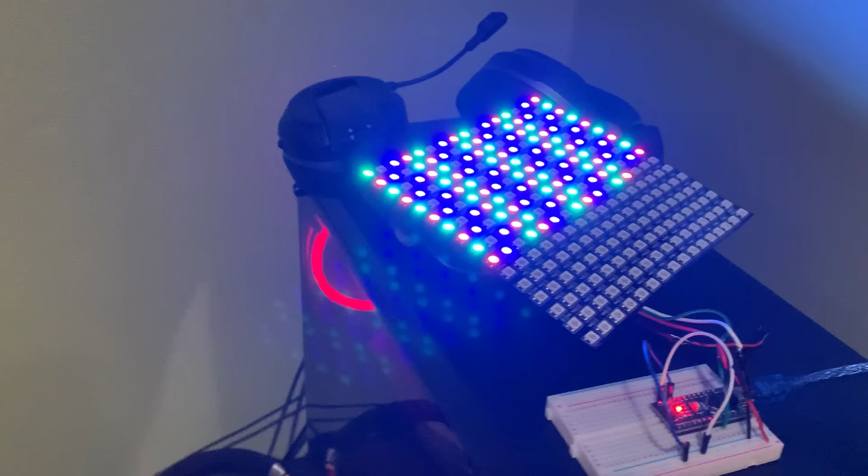So first let's figure out some of Boomy's key features. Maybe the most defining feature is Boomy's animated face. The eyes are always changing shape, and the whole face even changes to a danger icon. My first thought that comes to mind is to use a NeoPixel board. Basically, a NeoPixel board is a matrix of LEDs, and you can program each light to light up however you want it to. So I'm thinking I can program each face right onto the NeoPixel board.

Boomy can also drive itself, and it also has lights all over its body. So we're going to need a bunch of LEDs and some decent motors. Next, we have the collision detection system. Boomy bounces off of walls and is able to turn as it ricochets off of obstacles.

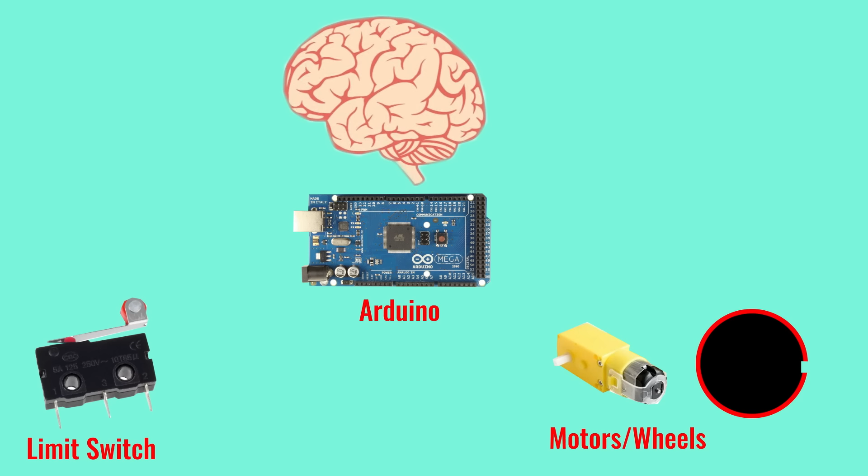This is an Arduino. You can think of it as the brain of the robot, and this is a limit switch. My printer uses them for homing. When the limit switch is clicked, it tells the printer's brain that the hot end is at the end of its travel path. If we strategically place these on Boomy to click when Boomy hits a wall, we can send the message to the brain and then tell Boomy's wheels to back up and turn.

Notice how Boomy has a scanning laser. I found these red lasers on Amazon that I think are used for scanning barcodes. If I could attach this laser to a servo arm, I could easily recreate this feature.

You guys keep asking me, does it explode? Does it explode? You guys are gonna make me explode, Jesus.

Now that we have a general idea of how to do all this, I started to sketch out some of our ideas. The NeoPixel is 16 by 16 lights, right? So maybe we can create faces by grouping lights together. Here I'm trying to plan out exactly where to put the limit switches so the wheels can push on them when Boomy hits a wall. Now let's order some electronics that we know we're going to need.

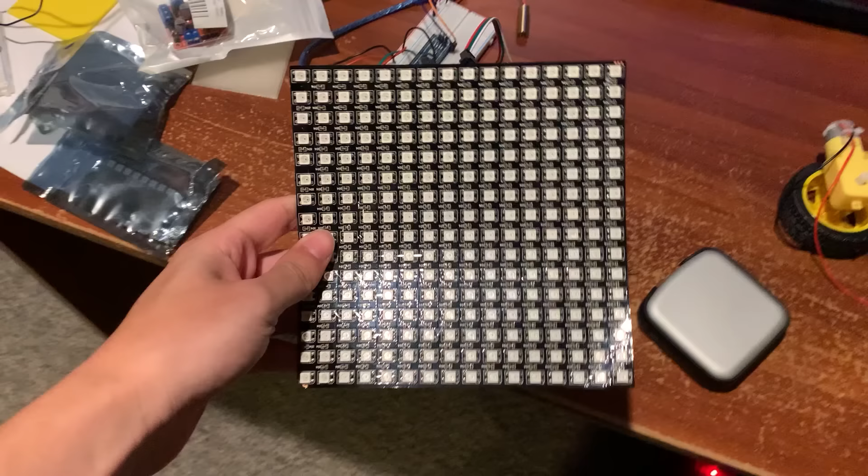Alright, so this thing was a good starting point for us, but we really need a smaller NeoPixel board. So I ordered a smaller one. I think this one's going to work a lot better. It's an 8 by 8 instead of the 16 by 16. I also printed out a bunch of different diffusers, some in clear PLA and some in varying thicknesses of yellow PLA. I decided on a 4mm thick piece of yellow PLA that's printed completely solid. It seems to get the job done.

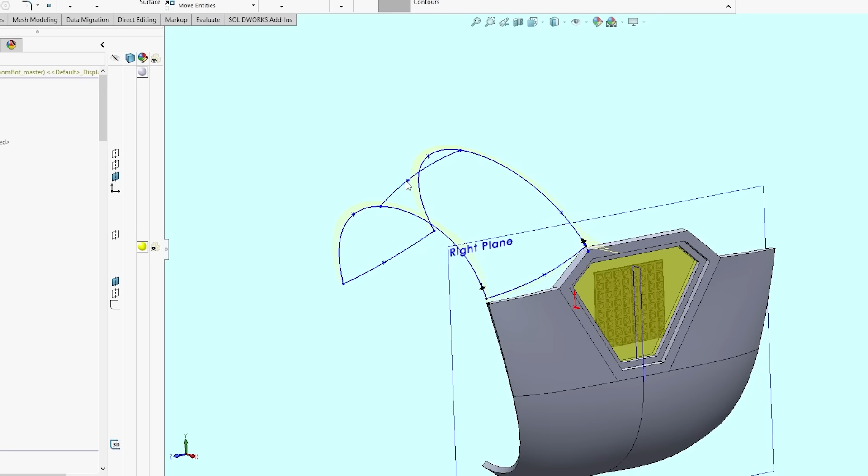Now it's time to 3D model Boomy. Let's get it. The entire model was created while referencing some images of Boomy, but everything was built around the scale of the NeoPixel board at the center. Boomy has some really complex curves, so I surfaced the outer shell using splines. And here we are. Boomy is alive and well, guys.

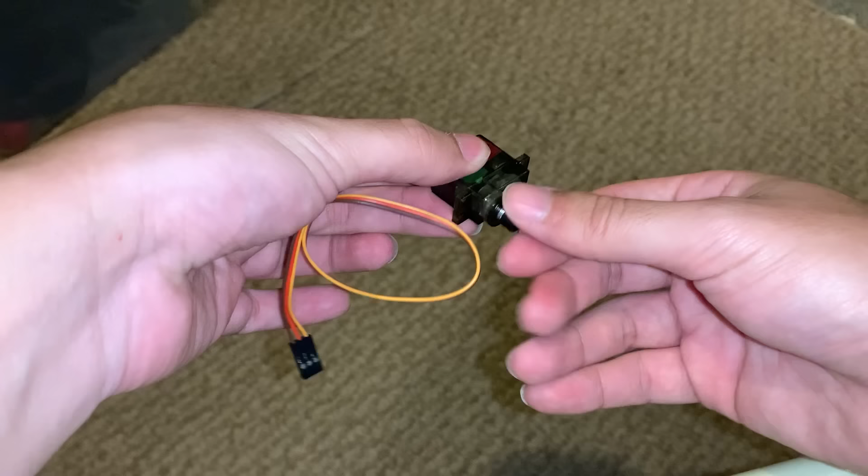Yeah. Alright, so Boomy is going to have two modes. First, when Boomy is turned on, it'll switch between a couple of faces, and the top is going to pop up. I'm going to recreate this feature with the 4-bar linkage mechanism I designed. Basically, a servo is going to move the roof up and down to give Boomy some emotion. I don't even have to test it because I know it's going to work. And if it doesn't work...

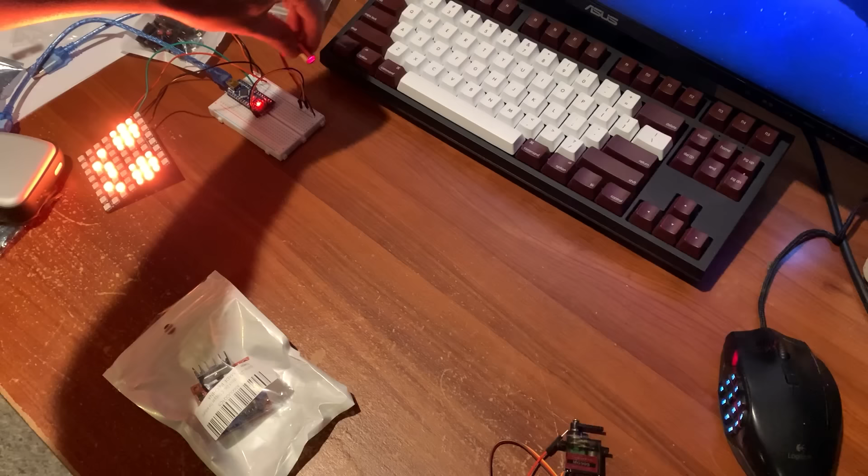Alright, so the next part of the design we're talking about? The second mode will be button activated, and Boomy will drive forward with hobby motors looking for enemies. As Boomy is driving, the scanning laser is going to move up and down on a servo arm. Boomy also has a collision detection system. The wheels rotate, and when Boomy hits a wall, it will trigger a limit switch that tells Boomy to back up and pivot. The infrared sensor will allow Boomy to see humans, and it will attack anyone it sees, speeding up in the direction of the enemy.

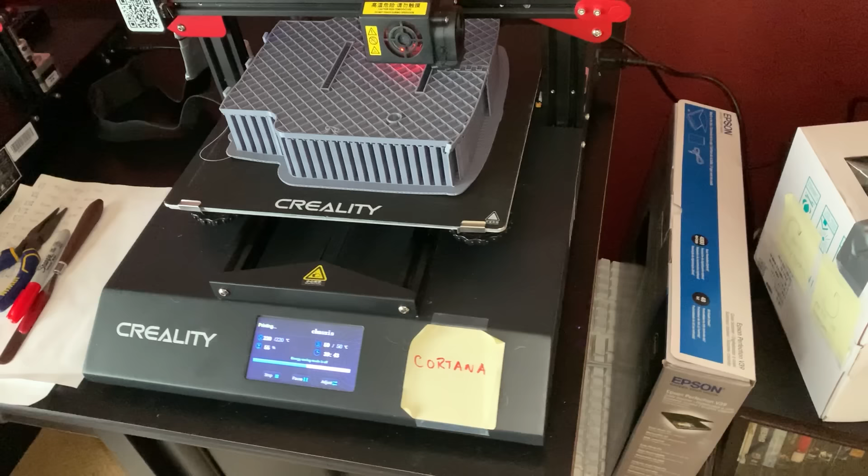In the meantime, we'll start printing out Boomy. I printed these parts out on my two CR10S Pro V2s. Alright, so this is the 4-bar mechanism I designed to move the top hinge, and it works on my first try, dude. Look at this. So the servo's gonna drive it back and forward. Your boy's a freaking genius, yeah. I also got the scanning laser to work. Check this out.

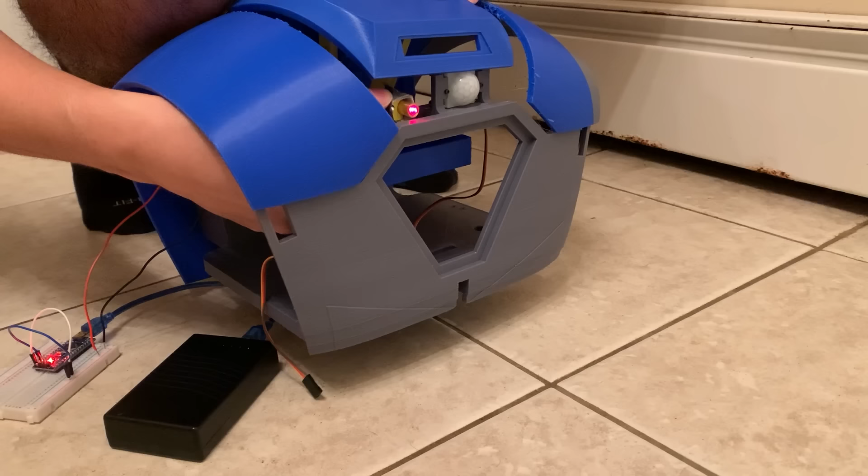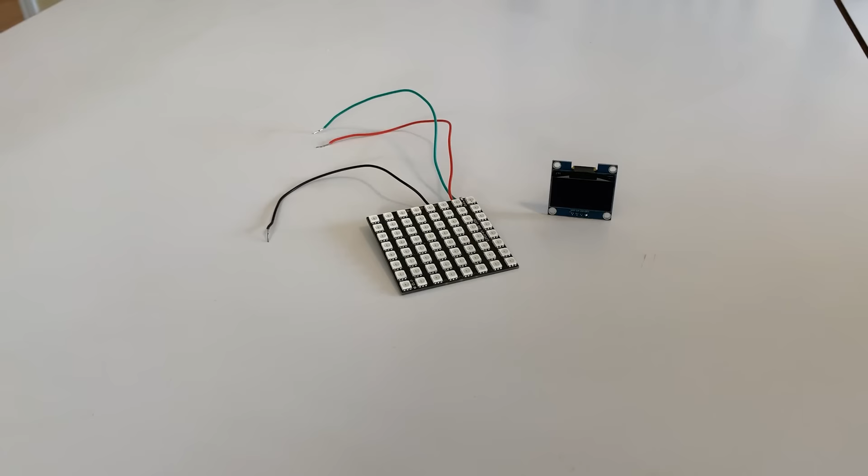Someone on TikTok suggested I use an OLED display instead of a NeoPixel board because you can display animated GIFs. So we picked one up. Check it out, it's so awesome. But it's small as hell compared to the NeoPixel. Look at that, what the heck? Bro, this is one of the biggest ones they have too.

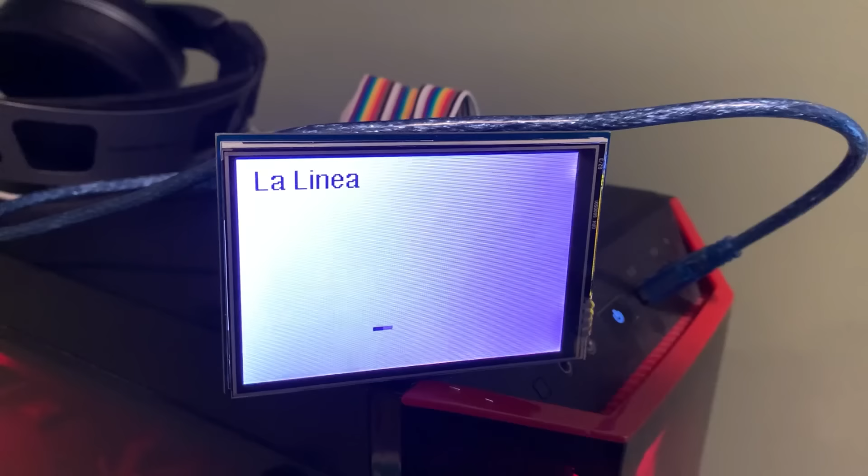Someone else from TikTok suggested using a mini LCD display to display images with color. These things are dope, man. They're nice and big, 3.5-inch size, and apparently are full color displays that you can show animations on. Dude, that looks so bad. Why does it look terrible? Bro, that is just not good. I think the Arduino doesn't have enough memory to process all the pixels on the LCD. Okay, so the animated GIF idea isn't gonna work.

I was looking at the documentation for this thing and I found that you can animate shapes. This could work. Boomy's face is pretty simple. Boomy also has a little bit of a twitch effect going on, and I found this scroll page feature that could be useful. I'm not good at figuring this stuff out, but I am good at taking examples that already work and tweaking them to get kind of what I need.

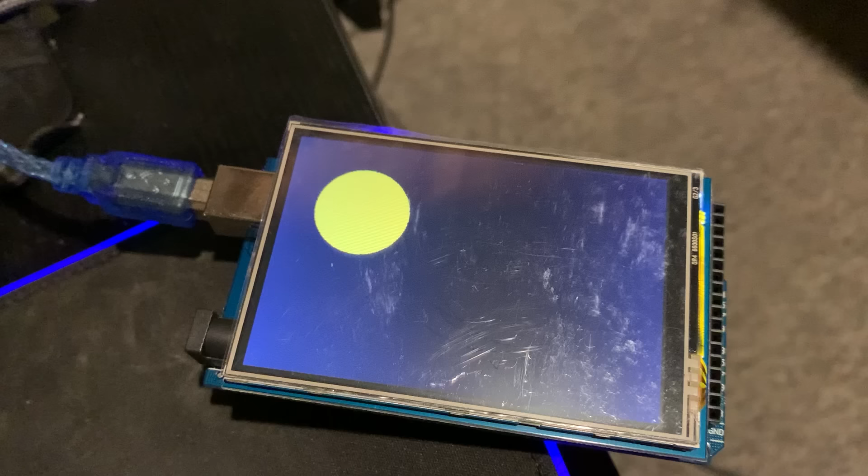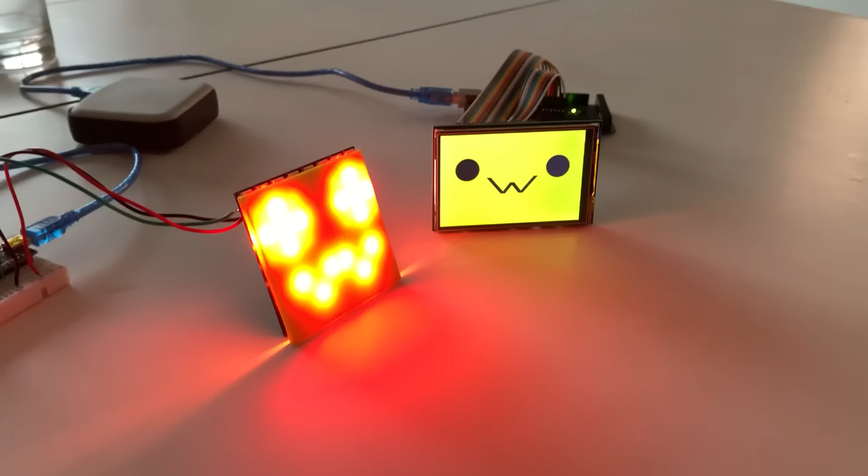First, I started by creating basic shapes and getting the size and position correct. Then I inverted the colors and made the background yellow. Then I made the eyes blink by switching them from circles to horizontal lines quickly. Then I figured out the twitching effect by using the scroll feature back and forth really quickly and just looping it forever. Let's go, baby. I think this looks infinitely better than the NeoPixel, and the fact that I once considered using a NeoPixel is hilarious.

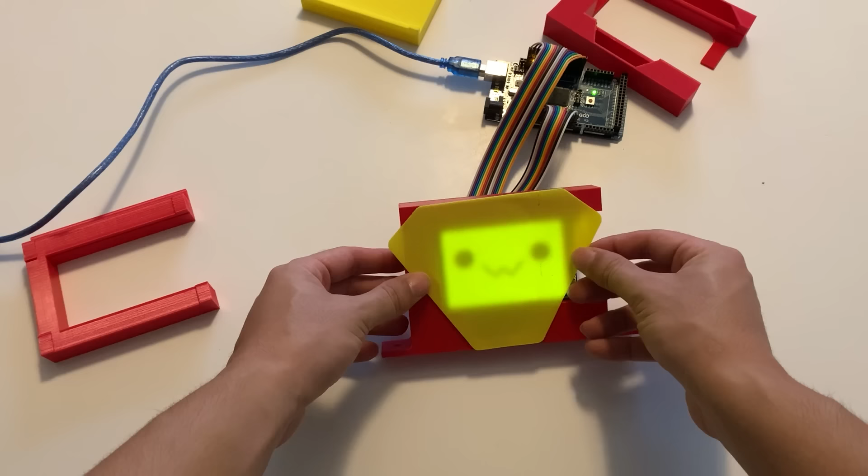The only issue with the LCD is that there aren't any holes that I could use for mounting. So I created this little adapter that I can slide into and that I can fasten down to the housing. The only issue is now there are awkward gaps between the LCD because it doesn't fill the whole front window. So I thought about filling those gaps with LEDs, but this was just getting too complicated.

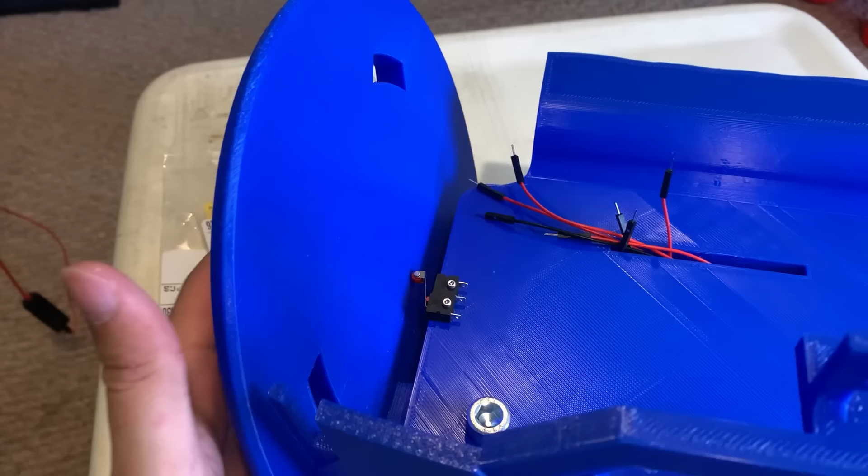Okay, I really want to take Boomy for a test drive, so let's get him wheeled up. I installed all the motors and the wheels and also the limit switches. Alright, Boomy. Let's see what you got. Alright. Not that way? No. It's like twice the size of my head, dude. It's crazy, bro. This thing is also heavy as hell, and I don't even have the top on yet, bro.

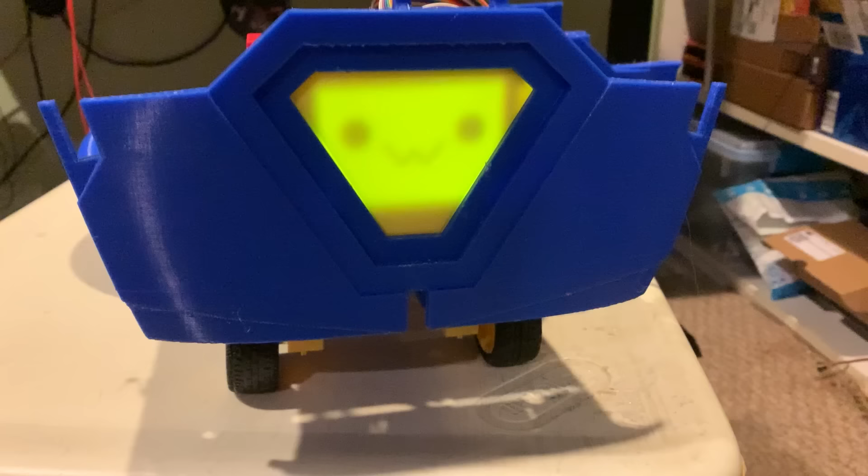Okay, so Boomy's got gaps around the LCD. He's slow. He's heavy. He's too big. And I think he could be more screen accurate. I think I did a decent job in the beginning, but he could look more like the in-game model. So I redesigned Boomy, and I think it looks so much better. He's about 20% smaller, and I added some new features.

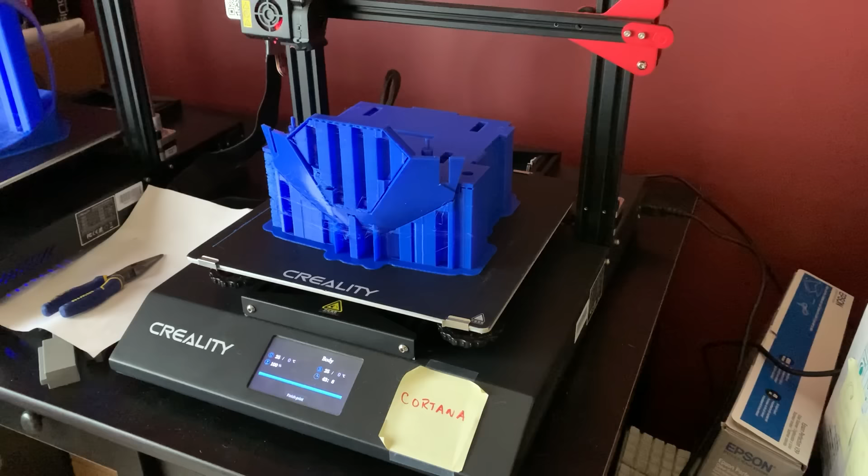I noticed the top swings completely open when Boomy goes into attack mode. I found this cool concealed hinge online, and I created one for Boomy to swing the top open with the servo. Also, I made the side wheels have a double ring design. The inner ring is going to rotate and spin the LEDs, while the outside wheel rotates about a different axis to hit the limit switch for collision detection. Also, this model was built around the LCD, so now the front window is seamless. Now it's time to print the new Boomy out.

Introducing new Boomy. Boomy looks amazing. I'm so glad I did a redesign. Boomy is definitely smaller and more like the in-game Boombot. Now there's no gaps surrounding the face window. Check out the concealed hinge. It works okay.

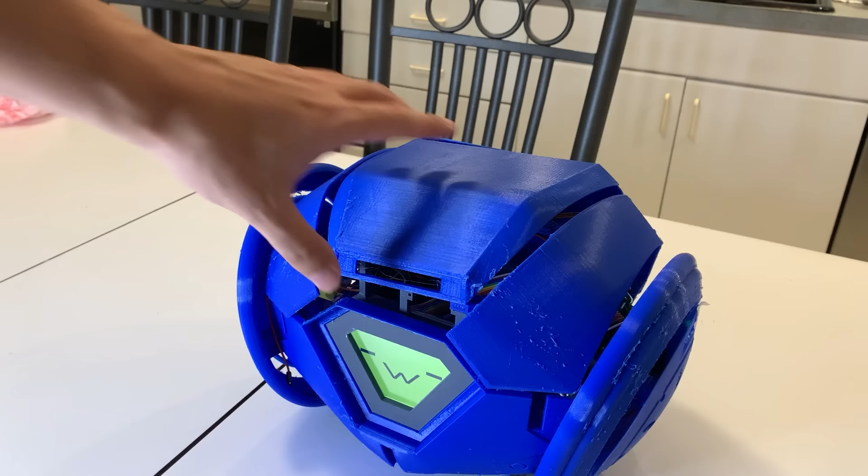It gets a little stuck, so I have to make some adjustments, but it's good for my first try. The dual ring design works great. It's exactly like I planned. Let's do a little test drive.

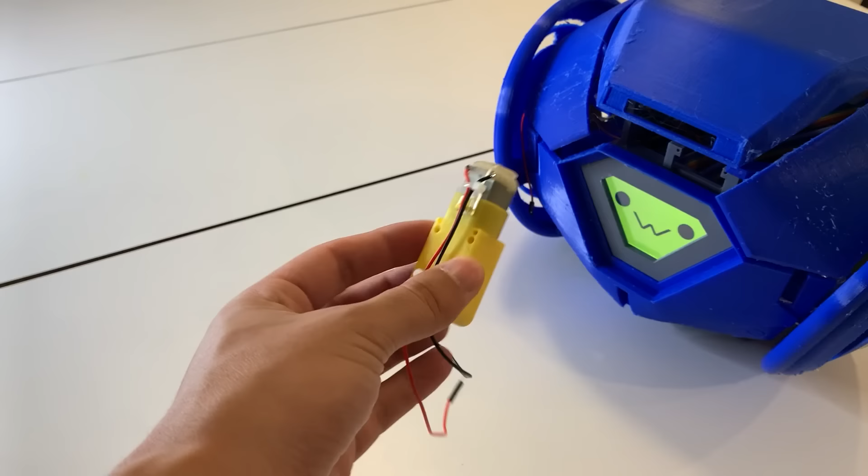Okay, so this is pretty good, but I still want Boomy to be faster. So I ordered a stronger motor with 4 times the torque. Boom Boom's gonna zoom zoom. Since I'm changing up the wheels, I might as well make the side wheels the actual wheels. Currently the wheels are using a dual ring design and the outer wheel is being used for the collision detection system. So basically I'm gonna have to come up with a new way to detect obstacles.

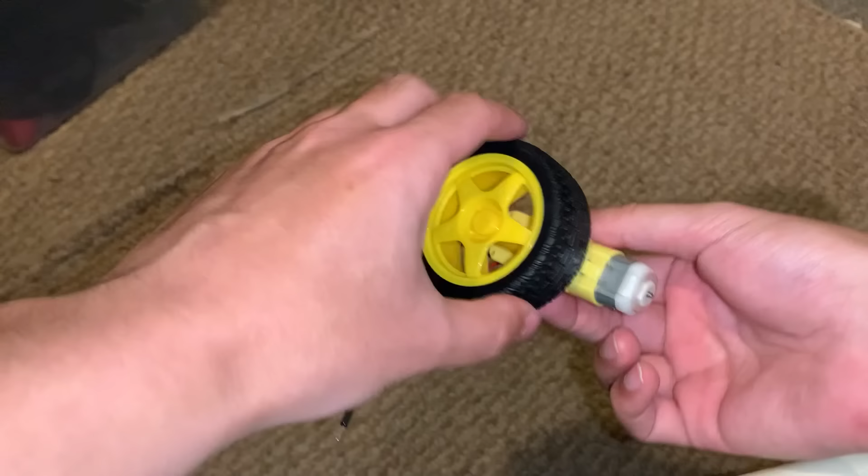One reason I avoided doing this was also because these motors come with tires and now I'll have to make custom ones. I think I'll try printing them in rubber, in TPU. Or if that doesn't work, maybe cast some custom tires in a mold.

Notice how the wheels deploy when Boomy switches modes. I want to make it so that when you squeeze on the side wheels, springs push Boomy's wheels out and let Boomy drive forward. I'm also hoping the springs help Boomy rock back and forth like in the game.

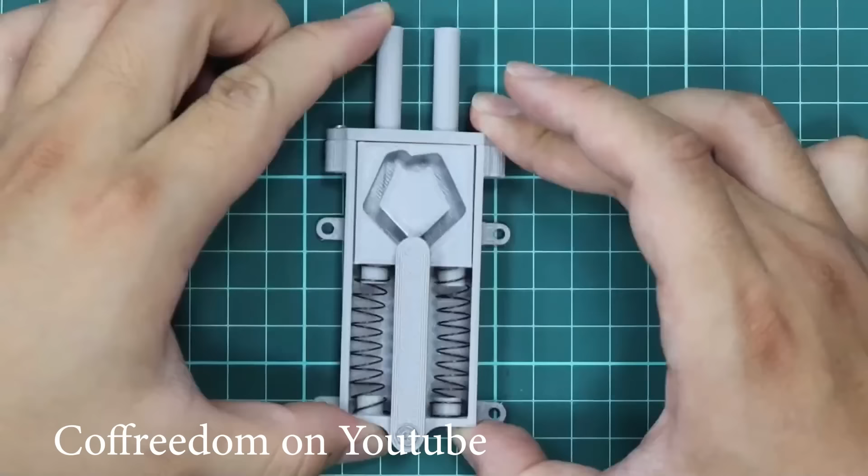I found this cool spring-loaded latch mechanism online. As you push on the mechanism, a pin moves about a heart-shaped groove, allowing the mechanism to lock in the crevices. This mechanism is restricted to linear motion in a singular plane. I'm wondering if I could modify it to work with angular motion to swing Boomy's wheels out.

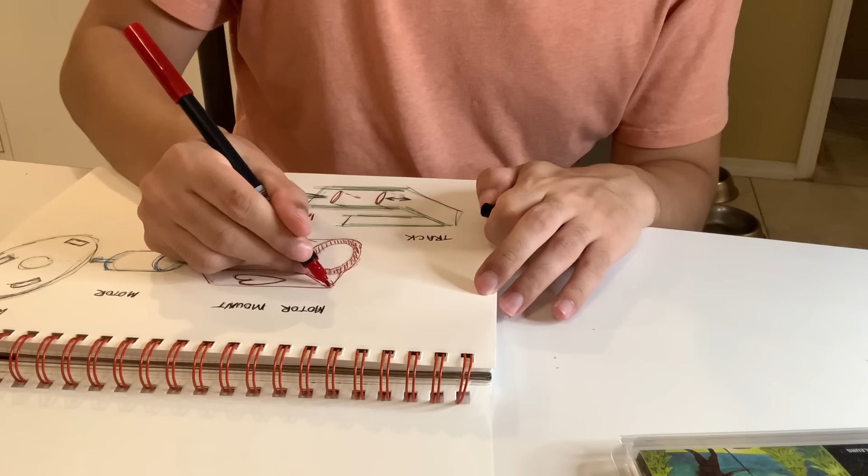Boomy's wheels are at an angle while in a resting state. Then when you push on them, they swing out and allow Boomy to drive on the ground. I started sketching out what I thought the shape should look like. The piece that's moving needs to house the motor and wheel, and it could have features that slide along a track of the main body of the mechanism. I also need to make sure when it swings out in its final position, the wheels are flat with the ground.

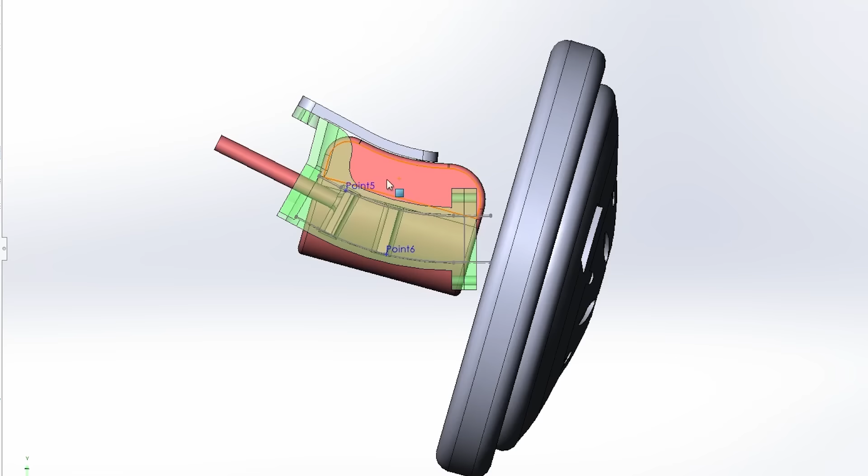I started modeling my design in SolidWorks. The great thing about SolidWorks is you can apply mate conditions and simulate the motion of the mechanism, which will save me a lot of time so I don't have to keep printing out pieces and prototyping. This part literally took me forever. It took tons of prototyping and problem solving to get this to work.

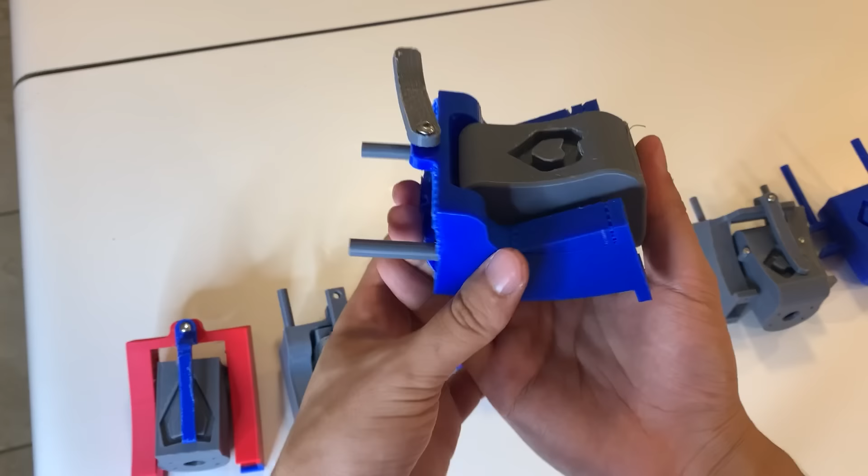I kind of guessed with how stiff my springs should be, and the initial springs were way too strong. I could barely wind up the mechanism. I ordered new ones and they work like a charm. Also, the springs were getting stuck in this slot that the motor mount slides through, so I printed washers to fix this. I also made the top groove component modular and separate from the motor housing, so I could quickly reprint and test out new grooves to make it perfect.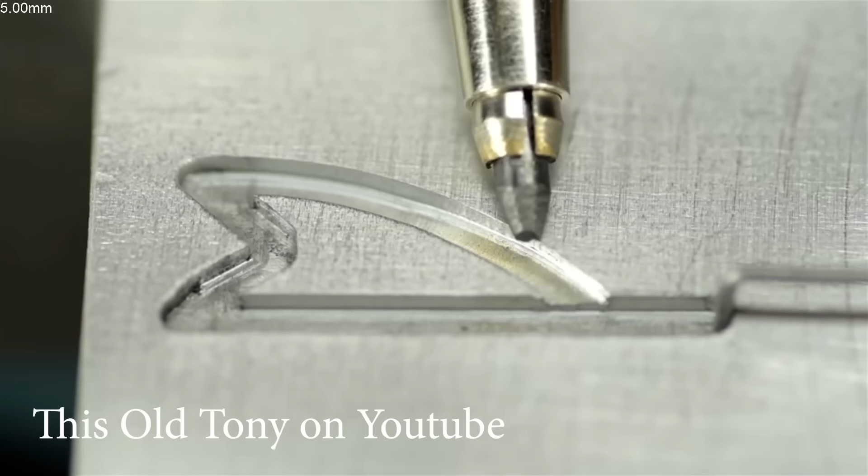In my research, I found This Old Tony also did a push latch mechanism in one plane. His design had a cliff feature so that the pin could only move clockwise around the heart-shaped groove. The little cliff, or difference in elevation, forces the pin to drive in only one direction. I was about 80% happy with it at this point, but someone suggested using lube and now it works perfect. You guys have some great ideas.

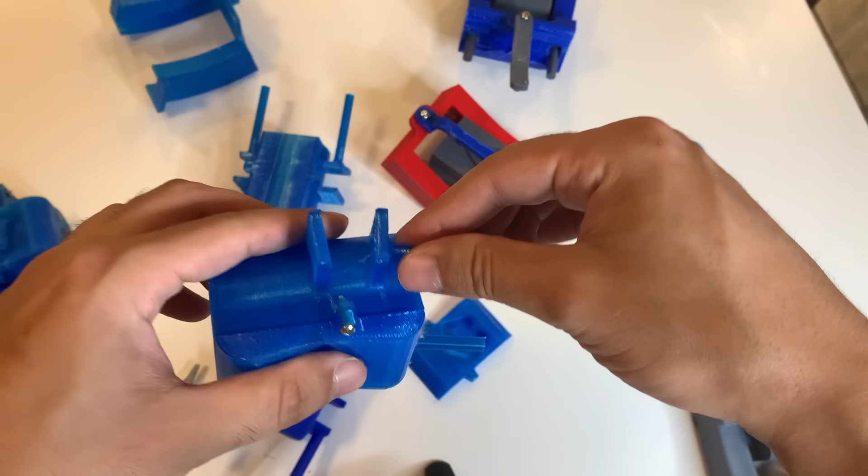We're the best. We still have to add back in the collision detection system. These ultrasonic sensors will tell Boomy how far away he is from obstacles. Based on values these sensors provide, Boomy will know if he is hitting a wall at an angle or straight on, and then I'll be able to program Boomy to back up and turn.

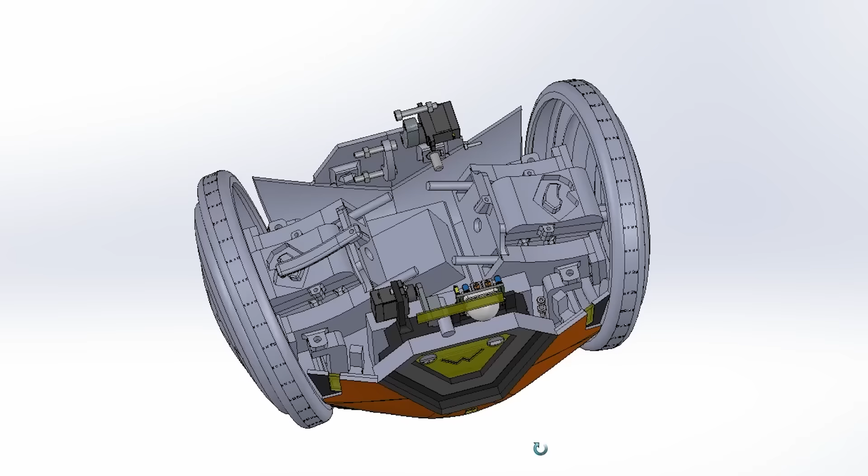While we're adding new features, I'm also going to add a vibration sensor. I've never used one of these before, but I plan on putting one on the underside of the roof so it could smack Boomy awake, just like in the game, and the face will change. I updated the CAD to include the new mechanism, the new wheels and their tires, and the ultrasonic sensors. I printed out the new Boomy and set them all up.

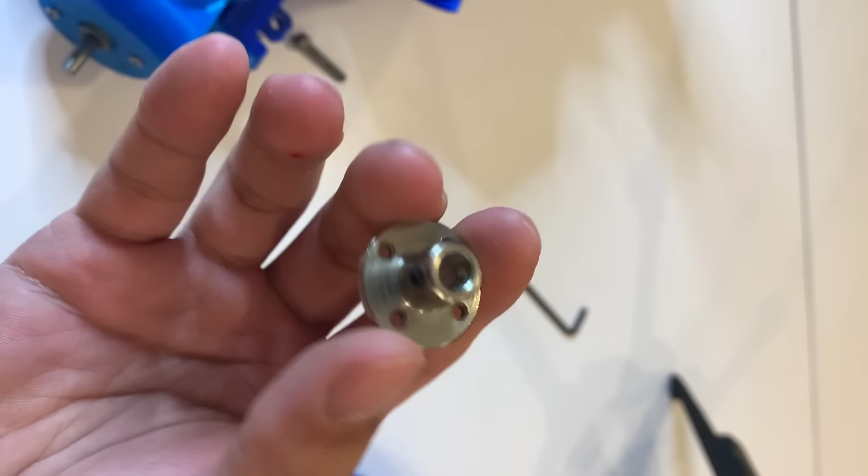With my new motors, I needed to figure out a way to transfer the torque from the motor to the wheel. Basically, this guy goes spin. How do we transfer the spin to this guy? I originally planned on using this adapter that tightens down to the motor shaft, and then I was going to connect the adapter to the wheel with screws.

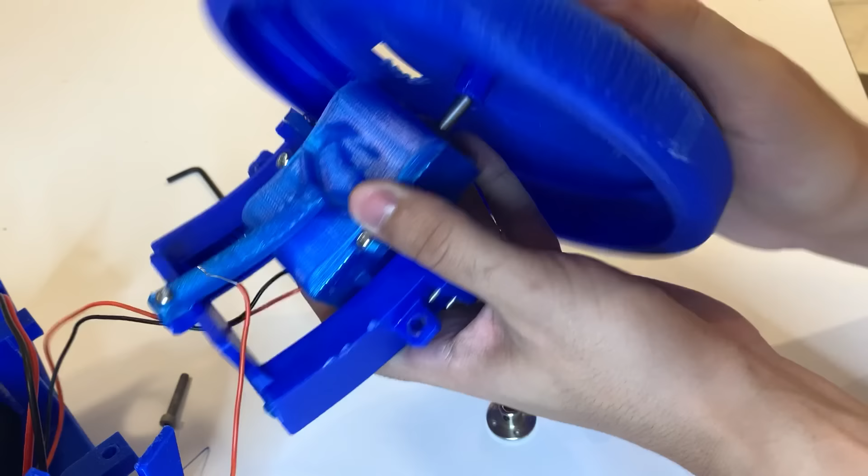But wait a second, your boy Dan is a giga chad. I realized I could just make the wheel have the exact same geometry of the motor shaft and press fit it onto the motor. Works like a charm. I also printed custom tires in TPU rubber for the wheels. This is the first time I did this and it was pretty dope. Here's the mechanism in action as you can push on the wheels and have them swing out. Let's see how fast the new Boomy is.

What are you doing, stupid?

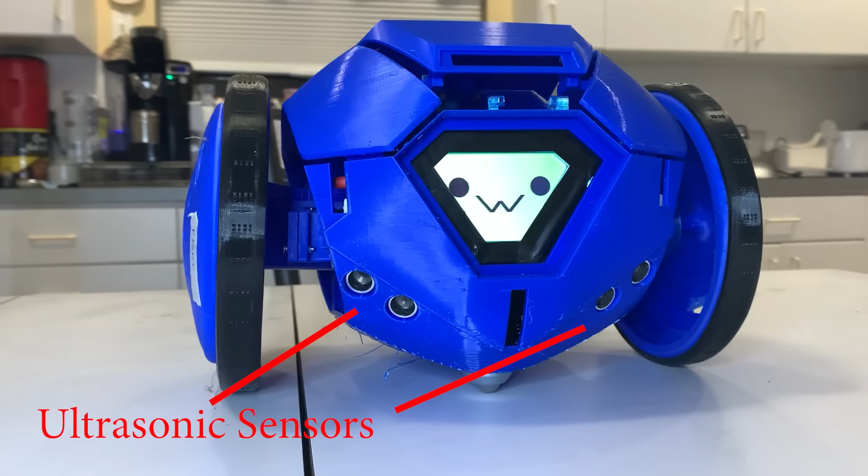When I started this project, I didn't want to use ultrasonic sensors because it would take away from the look of Boomy, but I actually think it looks pretty cool. Boomy's looking like a boombox. I also noticed that Boomy still isn't rocking back and forth.

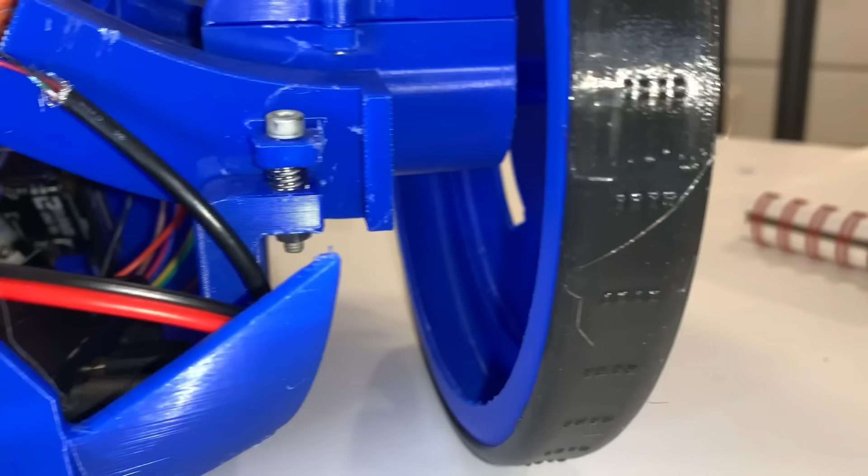I thought maybe I could add springs at the interface between where the wheels fasten down and the body sits to make it bouncy. It didn't work exactly as planned, but there's definitely something here. We need a way to disrupt the normal motion. My first idea was to design a mechanism that pushes Boomy's wheels back and forth with a servo. But the inside is already so cramped and complicated, we need a better and simpler solution.

Someone on TikTok suggested using a Reuleaux triangle instead of a perfect circle for the wheels. As the Reuleaux triangle rotates, the centroid moves in a circle instead of staying still. Let's try out these Dorito wheels. That's where it's at, yo. Where you going, Boomy?

That looks really good. I actually thought there was a little too much rocking, so I tried out wheels with 2 points instead of 3, kind of like a football shape. Also, the motor axis isn't centered, so every time it makes a full rotation, it should cause a lot of movement. I thought this motion looked a lot more natural and rhythmic, which kind of matches Raze's character. But to be honest, I like both.

So I posted a poll on TikTok and asked the community which they preferred. Almost 40,000 people gave their input and helped make this design decision. Thanks for helping me pick the winner.

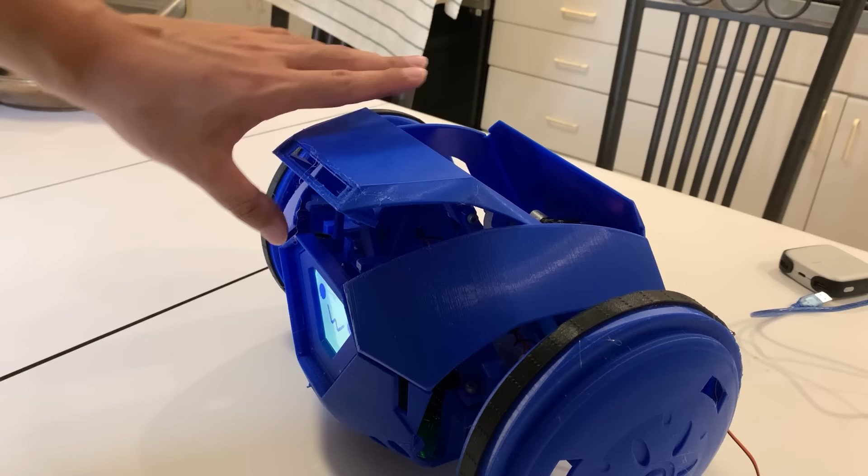Next, I worked on fixing the top roof hinge. My first version was pretty good, but the mechanism just misses being able to swing completely open on its own. So I hopped into SOLIDWORKS and redesigned the mechanism. I simulated the mechanism until I knew it'd be perfect. I reprinted the mechanism and now it works great.

Next, I worked on programming the scanning laser. This was pretty simple. I just needed to rotate a servo motor at the right angle. This was a small feature to add, but I think it looks so cool, especially in the dark.

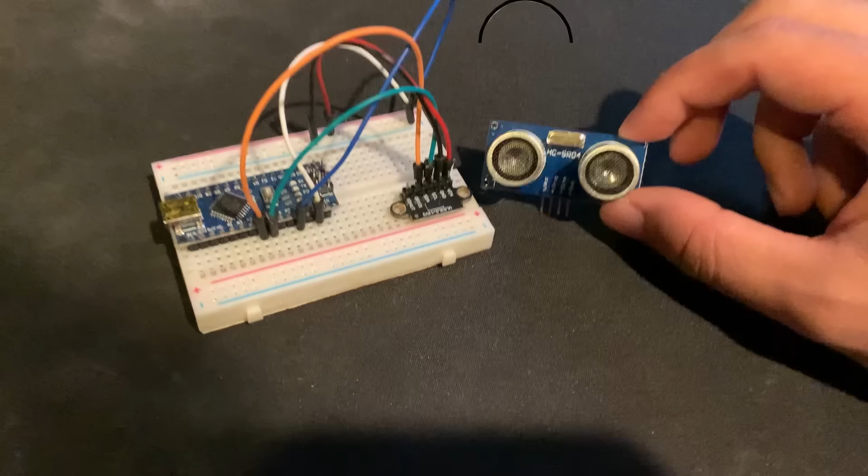For the collision detection system, I needed to pick a sensor. The ultrasonic sensors emit sound waves, while these time-of-flight sensors emit lasers. Basically, they both measure the time it takes to emit something, hit an object, and then return, which can help calculate a distance. I started with ultrasonic sensors, and they're working pretty well. I programmed Boomy to back up and turn whenever something was too close to Boomy. These turns were a little too big, so I decided to make the turns a little bit sharper.

I did notice that Boomy was getting some misreadings, causing Boomy to turn when there was no wall in front of him. Ugh, Boomy, I'm gonna throw you off a cliff.

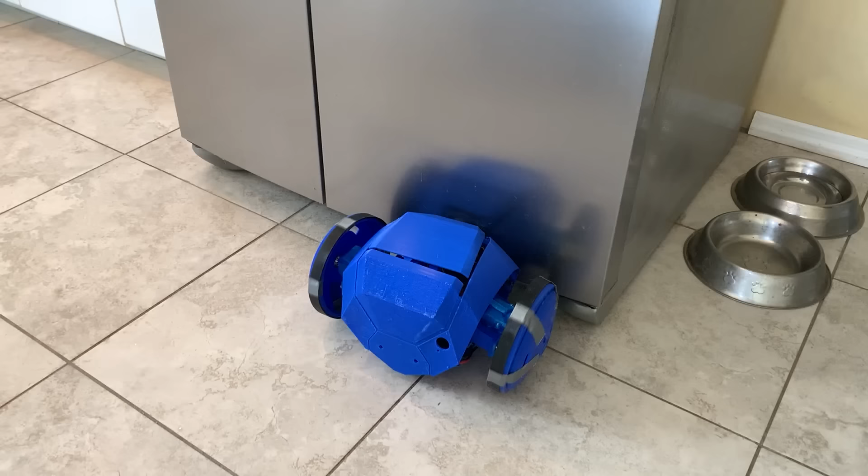I learned that ultrasonic sensors can be unreliable, so I tried the time-of-flight sensors. I know this clip doesn't show it, but this version was also getting misreadings with the time-of-flight sensors, even after making the current sensor reading an average of the last 3 values. I thought that would work. Also, because these sensors use light, they'll always be somewhat unreliable around sunlight and surfaces that aren't perfectly white. So I decided to switch back to ultrasonics because I do want to take Boomy outside.

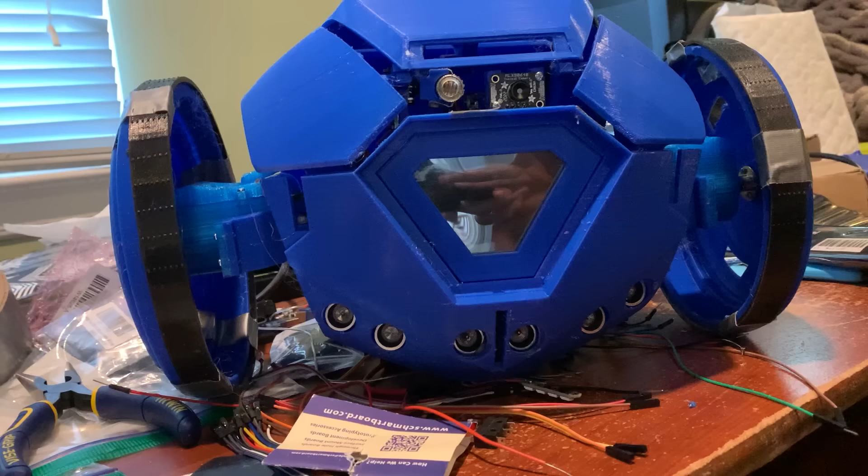After learning a ton about how these work, I made some big changes. I included a third middle sensor, so if the left or right sensor sees a wall, the middle one has to confirm the wall is actually there. The chances of a side sensor and a middle sensor having a false positive at the same time are pretty low. I also angled them slightly upwards to reduce possible false readings bouncing off of the ground. The combination of all of these things fixed Boomy, and now he doesn't get any misreadings.

So you remember this guy that said he was a giga chad? Well, turns out he's a big dumb idiot. The press fit idea was cool in theory for the wheels, but as the motors are driving, I think they warm up and heat the plastic, causing the friction fit to loosen, which makes this happen.

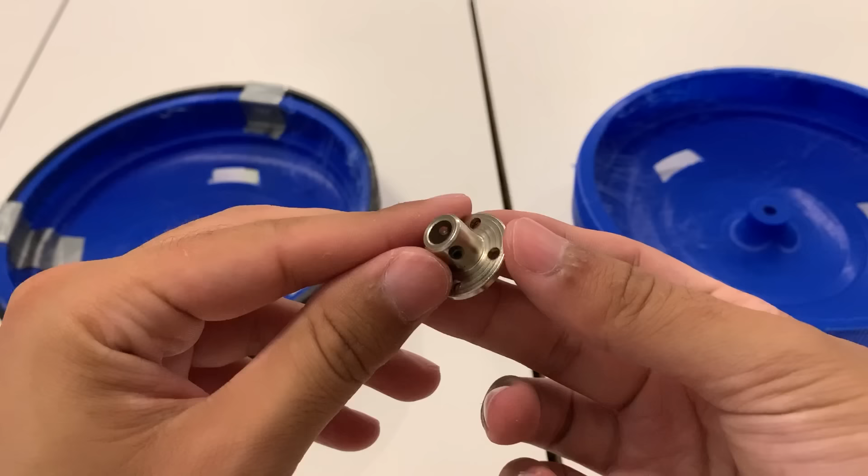Awesome. So I went back to the motor adapter idea, and now the wheels are tightly secured with set screws, and I've had way less issues with the wheels falling off.

So right now Boomy uses sound to locate surrounding obstacles. My plan was that once Boomy saw a human, those sensors would switch to looking for people. This is an issue though because you have to be close to the sensor. They'll also have a narrow angle of view which creates blind spots. They can't tell the difference between obstacles and humans. And also, what if the target moves quickly out of the way? Basically, this method sucks for chasing humans.

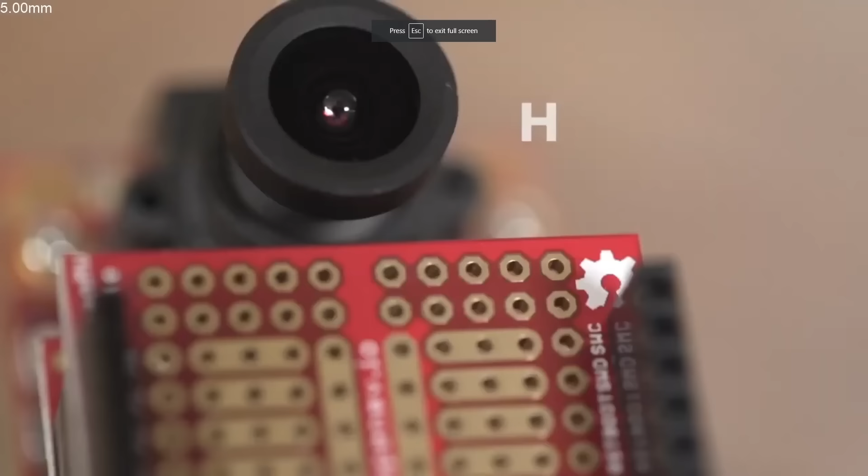I found this OpenMV camera that uses computer vision to recognize faces and detect humans. Using one of these methods, I can tell Boomy to steer based on what the camera sees. Although I'm worried the camera will be too low to the ground and I won't be able to see faces accurately when I'm right near a target.

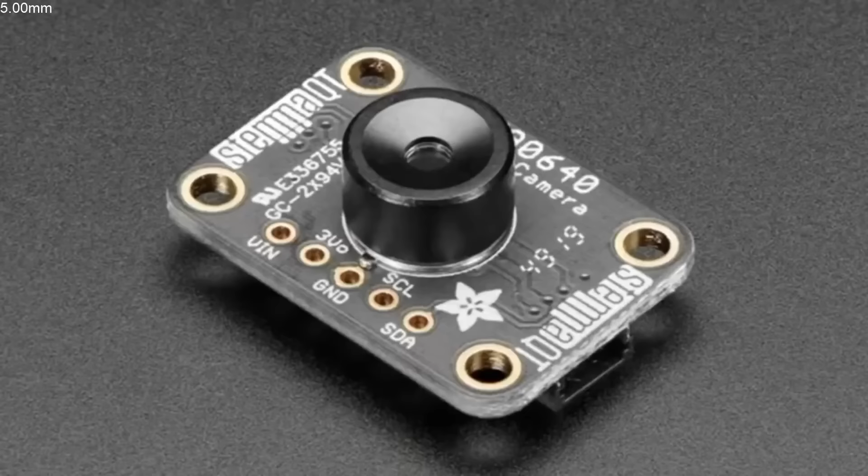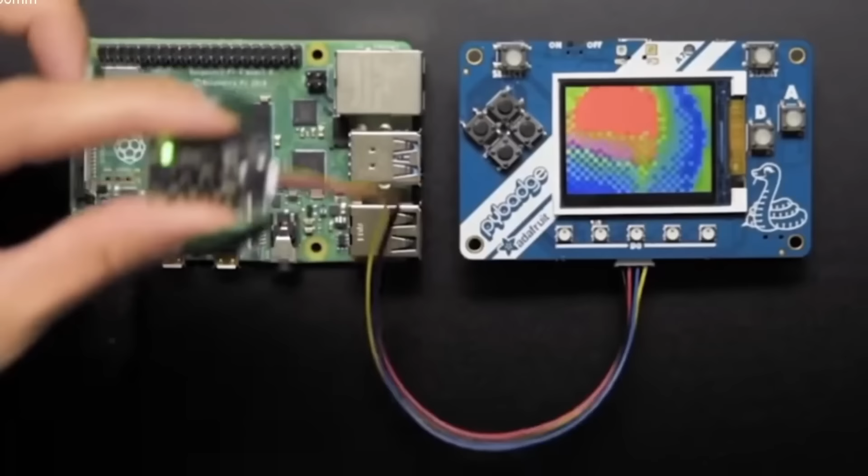What we really need is some sort of device that can detect the most amount of heat energy. I found this thermal camera and I think it's going to work great. That way I can just tell Boomy to move in the direction that is detecting the most amount of heat, and this should work even if Boomy's just looking at my feet. Anyways, I ordered both and we're going to see what works. I have a feeling the thermal side is going to be the winner, but even if I don't use the computer vision camera, I think I'll use it whenever I make a Killjoy turret.

I got the thermal camera and mounted it to Boomy. Let's figure out how this works. Basically, the heat camera outputs a 32 by 24 grid of temperature data points. This was a lot of data, updating like 4 times a second, so the refresh rate is pretty slow. I'm hoping it'll be fast enough to work.

So my plan is for Boomy to see the temperatures, figure out which spot has the most heat points close to the human body temperature, and then map a midpoint. If that midpoint is off center, Boomy will turn to correctly center the midpoint. My algorithm will also prioritize areas with the most heat points next to each other, so hopefully it'll not care about other hot things in the room.

Let's go. Holy crap. That took forever. After Boomy was equipped with his new thermal sight, he decided to make some new friends.

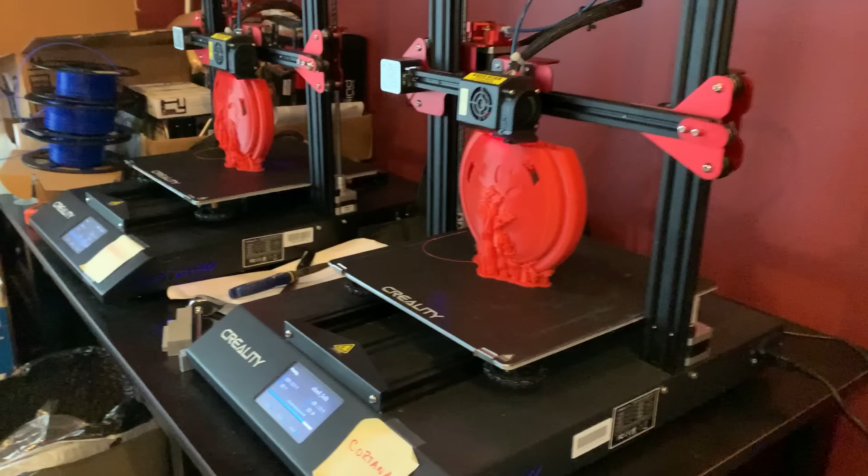I decided to take away the football shape of the old wheels and increase the center axis offset more dramatically. Well, don't need these wheels anymore. I'm hoping I can get more speed out of a perfect circle for wheels. I think I like this wobble way more now, and it has good speed. However, this only works when both wheels are 180 degrees out of sync.

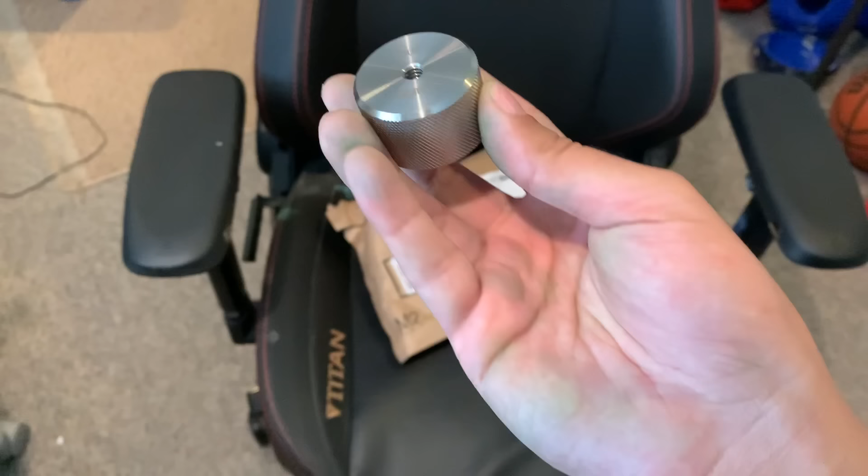But Boomy has been popping wheelies lately, and I'm pretty sure that's because the wheels sync up and are pushing a lot of momentum back and forth at the same time. I even tried using these counterweights made for cameras, and it didn't really help. So I thought maybe I could make one wheel offset and one wheel regular. I'll still get the wobble motion I want without the syncing issue. And it worked. I lost a little wobble, but honestly I love how janky it looks.

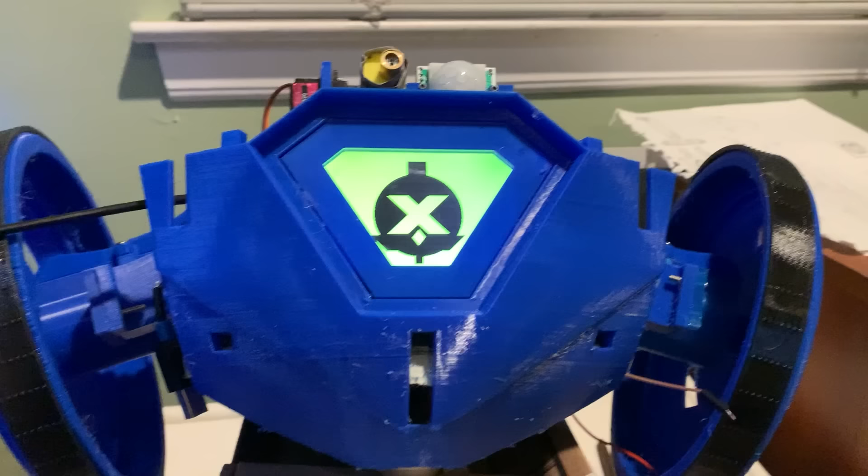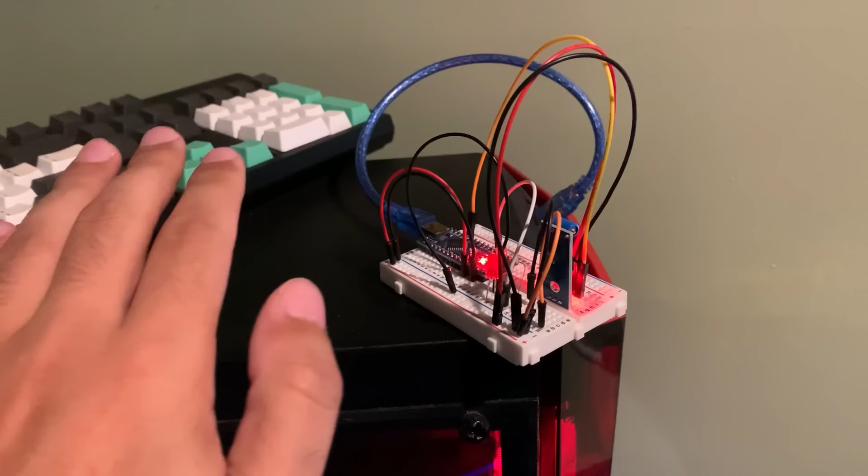I also programmed my boards to talk to each other through serial communication. When a human is seen, the roof will hatch open and the boom icon will come on. If there isn't a human in sight anymore, it'll go back to normal. I also took time to learn how to use the vibration sensor. I taped it under the roof and programmed Boomy to wake up when knocked on.

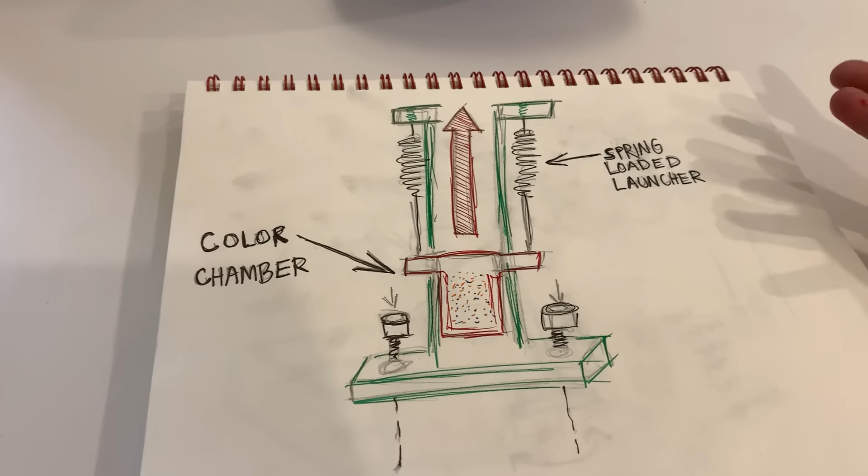The last feature I want to add is a color explosion. When Boomy explodes in game, he shoots out all different colors of paint. This made me think of color runs, and I was thinking I could create an explosion with the powder they use. So I ordered some. So I created a color launcher design. You load the color powder in the chamber and it's attached with springs to the launcher. So you pull back the color chamber and it goes zhit, bing, creating a color explosion.

This is my first prototype of the launcher. The spring force feels pretty strong, so I'm thinking I'll be able to launch a good amount of color powder. It sucks. The springs aren't strong enough to launch the powder, and it kind of just jumps out instead of dissipating into the air. LeBron James.

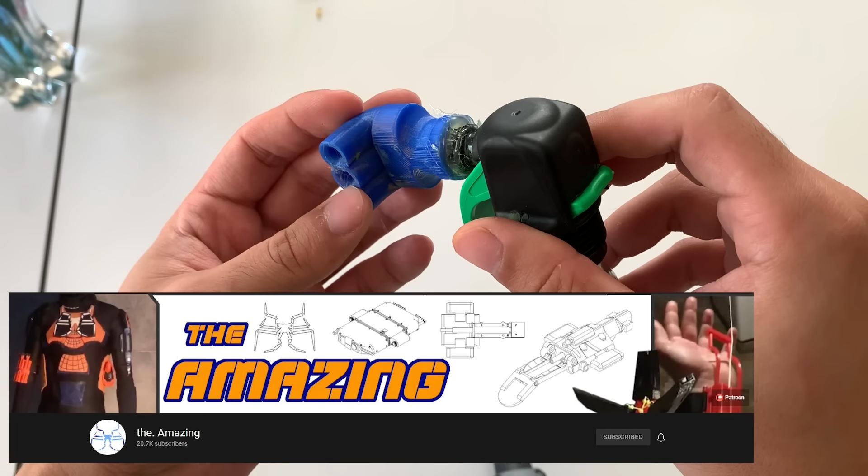I did a quick test with the can of compressed air used for cleaning keyboards. That's what we need. I was able to create a new solution with the help of some of my followers and the genius from the Amazing Labs. This new design uses CO2 cartridges, a bike tire inflator, and a 3-way straw nozzle I designed to shoot the color powder with the click of a trigger.

Holy, that was a good one. I redesigned the nozzle to be taller and I added a spiral effect so the powder releases at an angle instead of straight up. I also printed it in clear so I could see the powder loaded in each chamber. 3, 2, 1. Holy crap, that was sick.

You ready? Yeah. One. Is that sick? Yeah, it's kind of cool.

The last step for Boomy is to figure out a way to release the bike tire inflator lever electronically. The plan is to attach a motor to the trigger and connect the motor to the base with some thread. This will create a pulley motion, and the tightening of the thread will pull the trigger down and release the color powder. I attached the servo motor to the launcher with some JB Weld and tested it out.

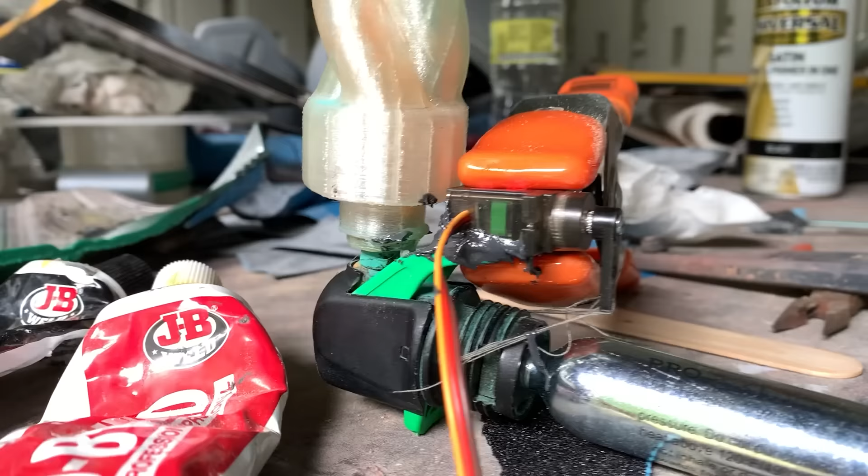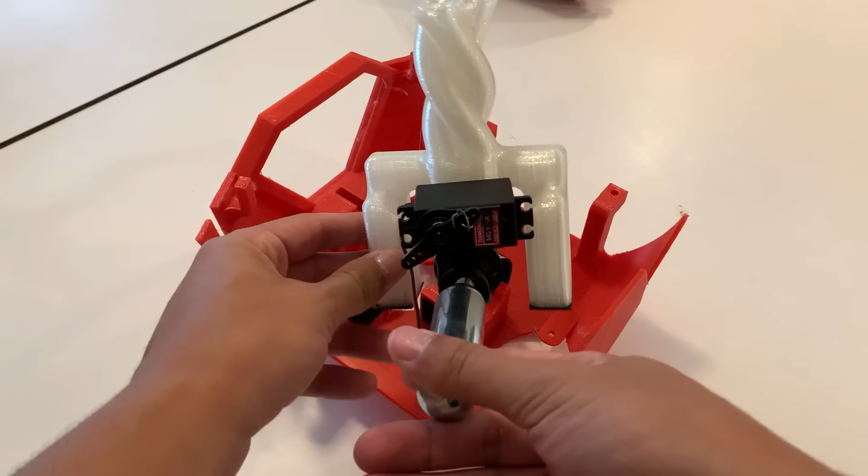The color powder release kinda sucks. When I was pulling the trigger, I exerted a lot of force in a small amount of time, and the CO2 shot out really quickly. But the motor can only move so fast. Probably the best way to do this is with a solenoid valve. These let you release tiny bits of air at a time, which would be perfect.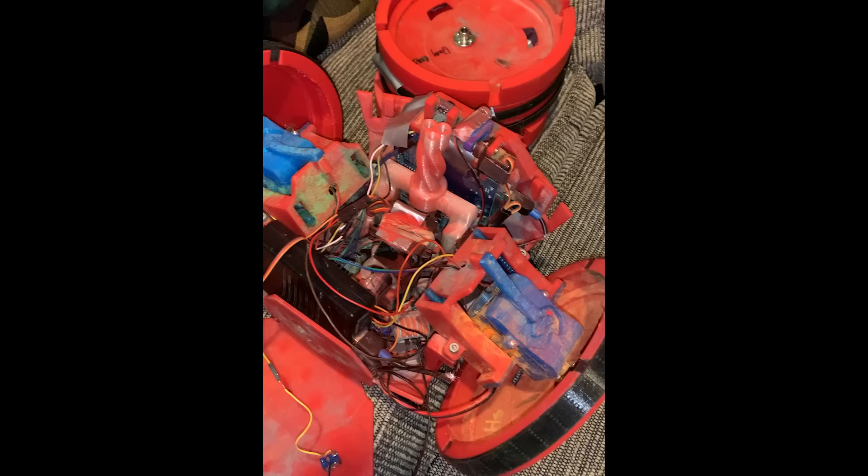However, CO2 cartridges have tons of pressure, like 850 psi. In order to do this safely without blowing my hand off, you would need a regulator, or a larger battery to operate a stronger solenoid that's rated for higher pressure, both of which cannot fit into the cramped space of the body. We need a simpler and easier solution.

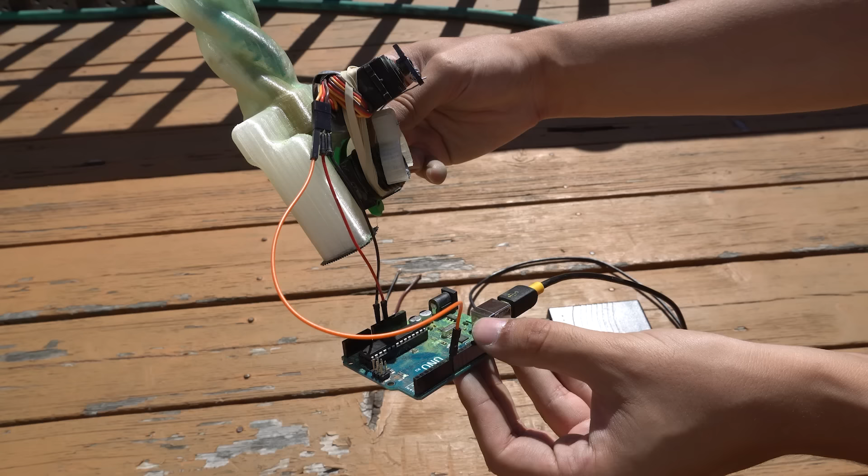One of my genius followers suggested what I'm gonna call the tooth yank method. I wrapped rubber bands around the bike tire inflator so that the CO2 will always want to be released. Then I printed out a small tooth shape of plastic that is wedged under the trigger to hold it up and prevent it from activating. The servo then yanks the tooth out and the trigger is forced down by the rubber bands, releasing all the CO2 in one swift motion.

I also decreased the diameter of the nozzle pipes to create more pressure. That's pretty good. See it? Go!

And now for the final part you've all been waiting for. That's right, the explosive jump. This is a jumping robot, and it weighs less than a tennis ball. We've reduced Boomy's weight a ton, but he still weighs about 5 pounds. A jumping robot is a huge project in itself, so unfortunately that's one component we'll have to leave out. Or maybe it's a project for future Dan.

I always order everything off Amazon, but I decided to check out Home Depot's spray paint selection. Alright, something like this is good for this orange. I might need something darker for something like this. They had basically every color I needed for pretty cheap. Think I got enough? Now it's time to sand and prime Boomy to get him ready for paint.

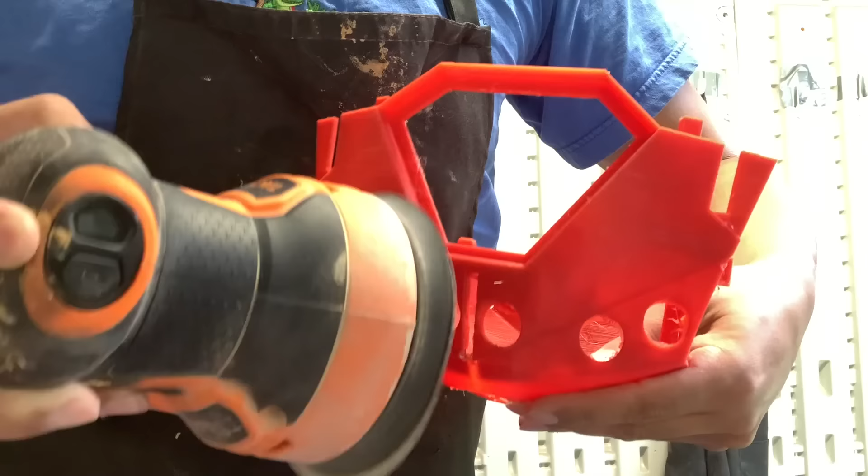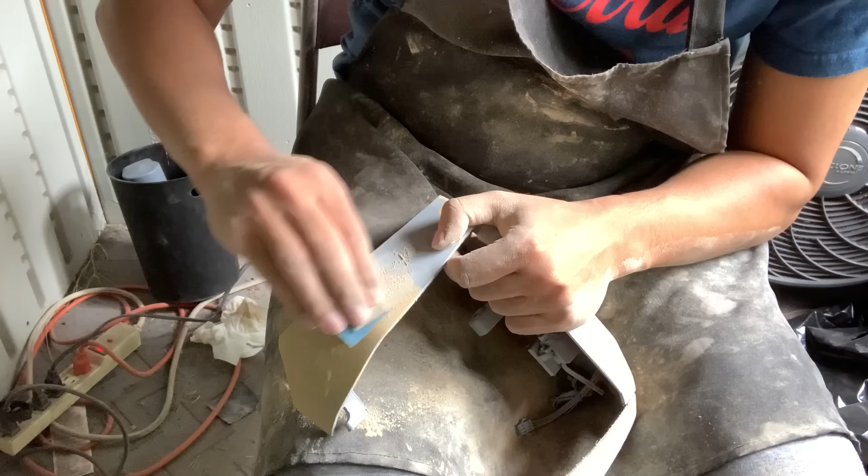I start with a low grit on an orbital sander to remove most of the layer lines. Then I use some wood fill to get rid of large gaps. And I layer in Dupli-Color filler primer until Boomy's nice and smooth. Sanding takes forever, but it's definitely worth it. Time to throw on some paint.

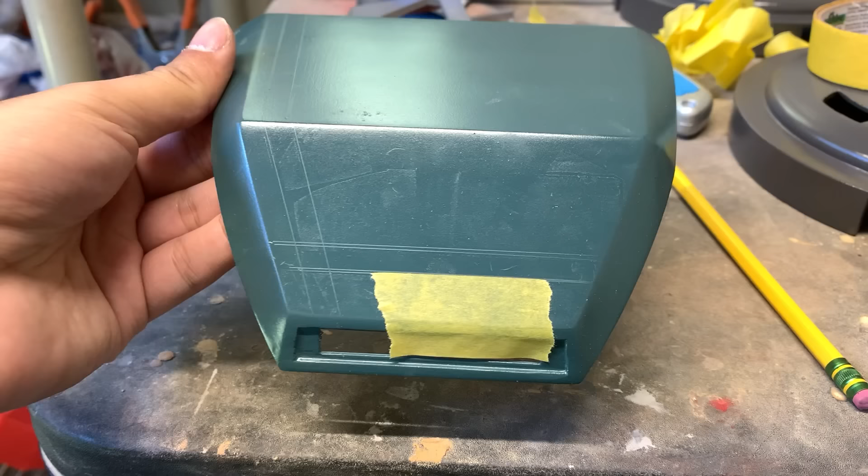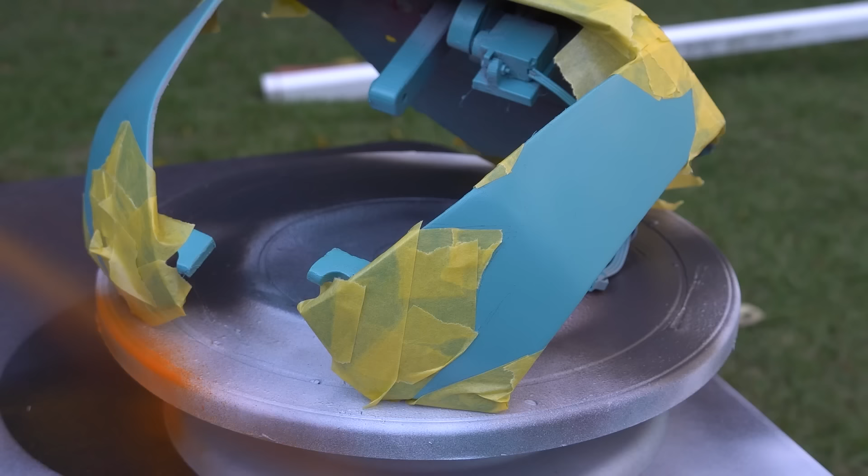Boomy has some detail lines that I had to trace out and then tape over. A frickin' bug landed on Boomy. Time to take off the tape and see how much I messed up. That actually looks pretty good. I really like how the orange splashes against the teal.

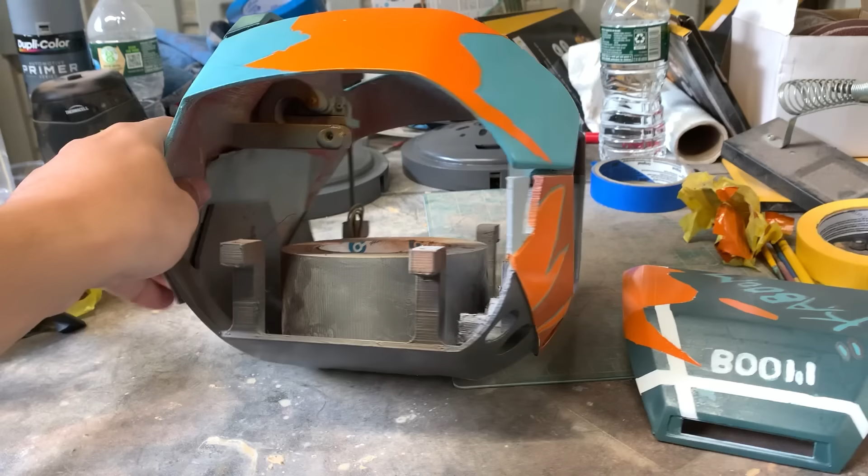I had to go back in and hand paint some black lines. But overall, I think Boomy's looking pretty awesome. I'm definitely not amazing at painting. It's actually super hard, but I'm learning a lot. I really like the aftermath of what my painting table looks like.

I also decided to 3D print an Elderflame Vandal for my final cosplay. Just a disclaimer for YouTube, this is a prop. And in the next scene, I add VFX on top of it. Please do not get mad at me, YouTube. Now let's see what Boomy's made of.

I need a break. Let's play some Valorant. What the heck is that? What? Okay. Brimstone.

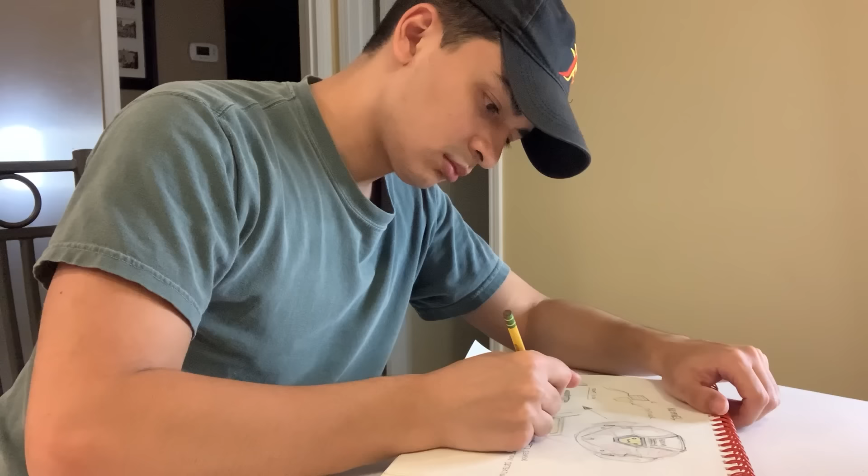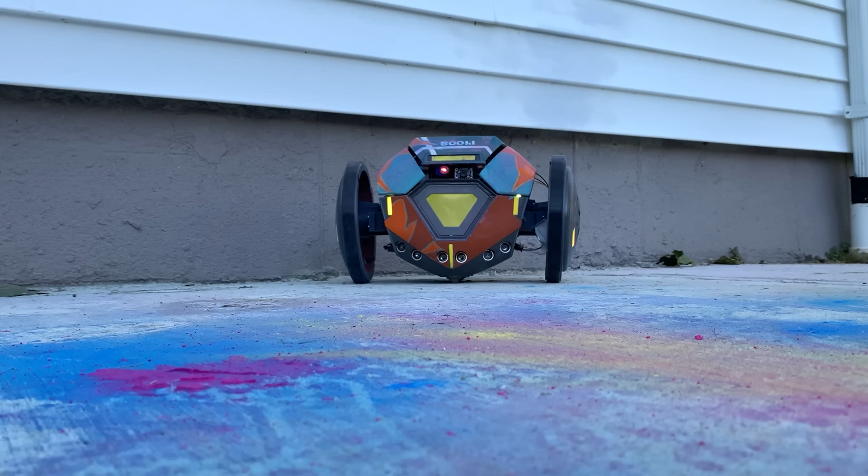I started this project to learn more about electronics, and I did that and way more. I honestly feel like I've learned more from this project than my entire time at college. While editing this video, I was laughing at myself for how bad the original Boombot looked. But you know what? That's fine, and that's actually part of engineering. I'm super proud of this final product, and 10 projects from now, I'll probably look back on this and think of all the things I could have done better.

Engineering aside, I'm actually most proud of what this means for me as a creator. I'm coming up on 2 years of making content, and this is the first time I feel like everything has clicked. I've realized I can combine my passion for 3D printing and engineering to make awesome inventions and recreations from my favorite video games and movies. And I love including you guys in the process. You guys have some amazing ideas.

With every road bump I encountered, my comments were filled with suggestions helping me problem solve. To be honest, Boomy feels more like a group project than my own passion project. All of this helped me realize that my best product will always be something that you guys have a hand in. I'm never gonna know everything, so why not involve a community that wants to help and give advice from their experiences? And don't get discouraged if you want to help but you aren't an engineer.

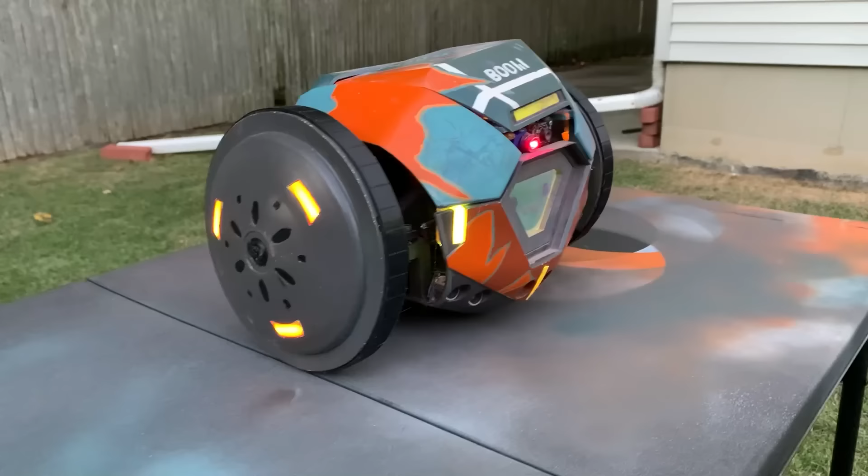I get some of my best advice from non-engineers, and in fact it's sometimes better because you can think outside the box. It could even be like, oh hey Danny, I saw Mark Rober do this thing this way, but I didn't see his particular video, so that's actually really helpful for me. Without you guys, I would probably be stuck with this hunk of plastic I used to be proud of. But seriously, thank you guys so much for following this journey, and I can't wait to see what else we make together.

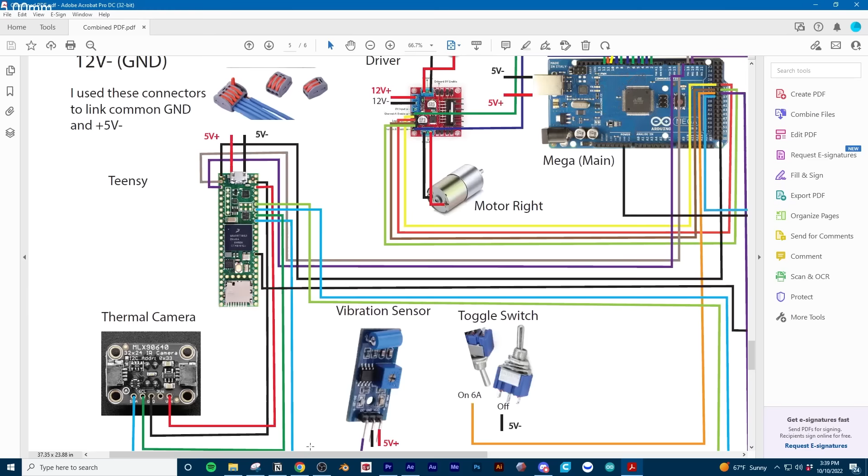If you're worried you don't have the experience to rebuild the Boomy, I've made another simpler version. I've simplified the design, and in terms of features, it only has the face, which is probably the coolest part. It will be plug and play, which means you just order the parts, upload the pre-written software, and then you have your own simple Boomy. If you don't have your own printer, maybe you could start saving for one. You could get a good starter printer nowadays for less than $200. You could also order the parts from somewhere like Shapeways that print the parts for you and then ship it to you, but at that point I'd probably just save for my own printer.